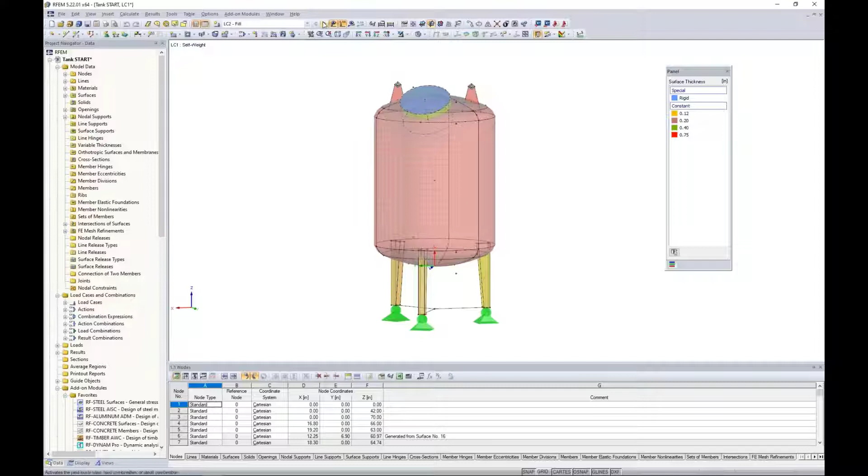We had applied the loads to the structure, and we can see within our drop-down box here are our different load cases. We have self-weight, which I don't have any visible loads displayed here because I didn't apply anything to the dead load other than accounting for the self-weight. Load case 2 here is the fill load, and this fill load was just an interior surface load within the inside of the tank.

We also have a wind load, so we can see the windward direction here from the global x-axis. We have a suction force on the leeward side. We also have a compression force coming up from underneath the tank, and we have a tension force up at the top here. Now we also put together all of our load combinations per the ASCE 7, so as we scroll through these, we can see all three of those different load cases acting together on the structure.

So starting where we ended from webinar 1, we'd want to run a calculation, and we can go to calculate all. For the sake of time, I've already gone ahead and done so.

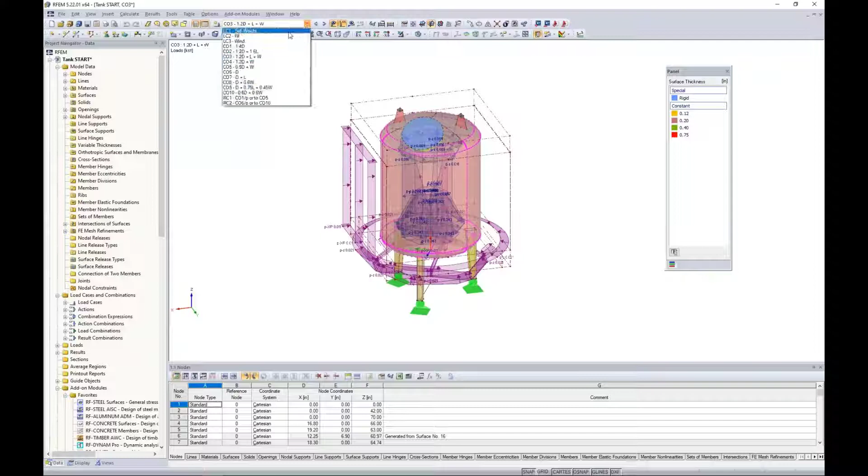So what we would be presented once we run the calculation is our results. Within the project navigator, we should now have this fourth tab available to us called results. I think it's helpful if we just collapse most of these trees here, just to slowly go through all of the visible options, and we'll start off with the global deformations.

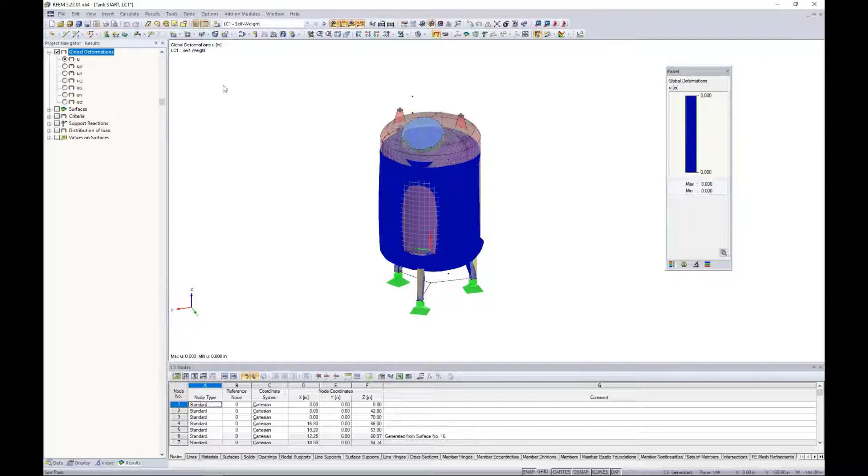As I'm scrolling through these different load cases and load combinations, and I can go ahead and turn off my loads as well, I'll see the general deflection of the structure. This might be helpful in understanding the behavior under the applied loads. If we see something kind of flying off the page here, then we would understand that maybe we didn't correctly model something, or maybe our loads were incorrectly applied. So it just gives us a sense here if everything is going well.

What else might be important is jumping back to my fill load. Remember from webinar 1, when I double click on this fill load, we have it increasing linear in the Z direction. At the top of the tank, I want this fill load to be 0, but as we slowly increase the depth, we eventually reach a magnitude of 0.4 kips per square foot, which makes sense since the bottom of the tank sees a higher fill load than the top.

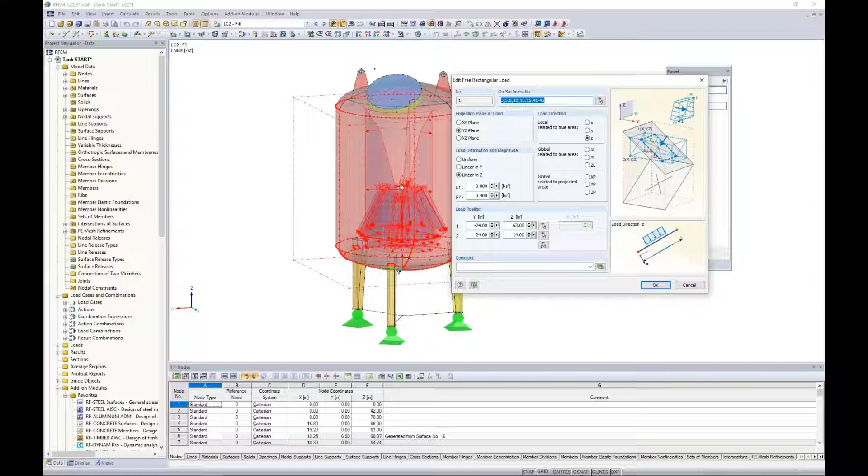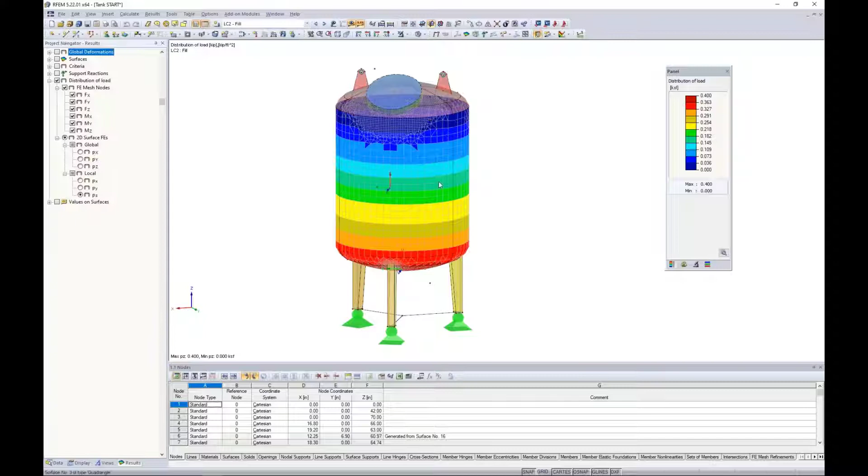So what I can do with this load case after running my results is turn off the global deformations, and instead take a look at the distribution of load. When I view the distribution of load in the local Z direction, we can see how this load was distributed on the FE elements.

At the top, we have this blue color, indicating 0 kips per square foot, which is exactly what I defined with that particular surface load. But at the bottom of the structure, we have these red contours defined, which equals 0.4 kips per square foot. So it's a nice validation that we correctly applied that fill load.

In a similar sense, we can take a look at the wind load. Remember, if I display this load again, we have it acting in the global X direction. Looking at the distribution of the load with these contours, I should see my highest compression force on this windward side, which relates to the negative value here. And then in the back, we have this suction or tension force, denoted by this yellow positive value at about 0.01 kips per square foot.

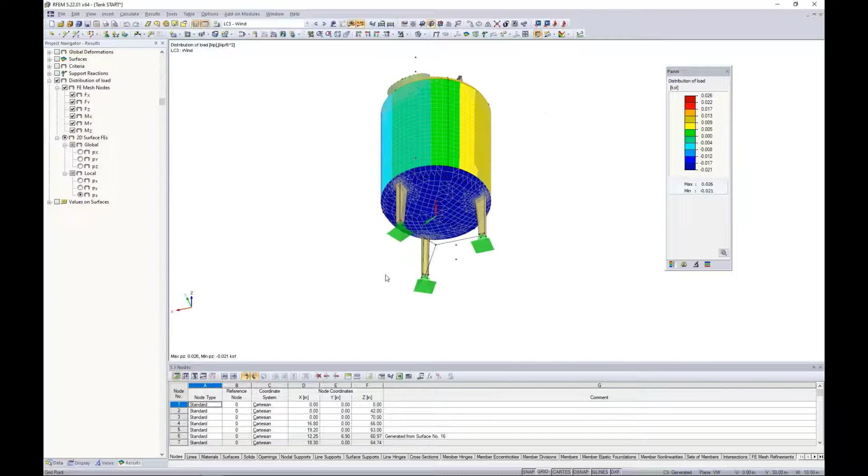At the sides, I should see essentially 0 because the wind's passing right over each of the side surfaces, denoted by the green color. If we take a look at the bottom, this shows the correct compression forces. And at the top, we have these suction forces denoted by red with a positive 0.026. So again, just a nice validation to ensure we've applied our loads correctly.

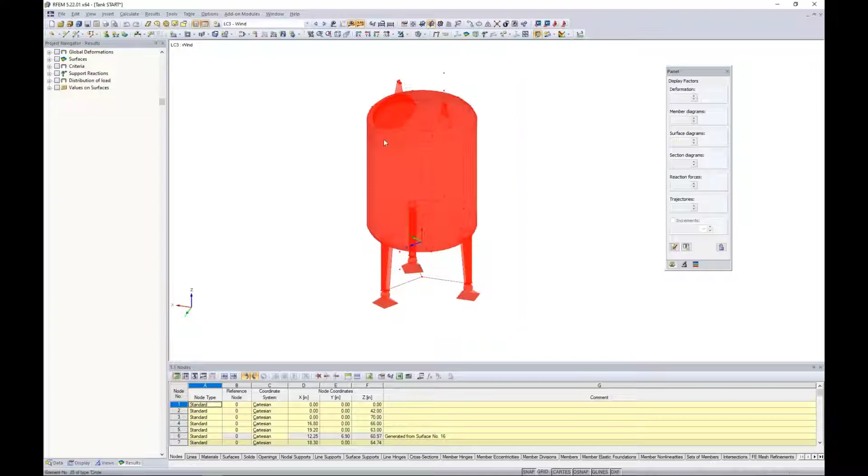We can also take a look at the entire structure by selecting it with my selection box. I right click and have the ability to view the center of gravity and info. The program throws up a warning that some elements have 0 density and won't be included in the center of gravity. We know this because in webinar 1 we created different intersections with our surfaces and deactivated components. We also have our rigid component for the top of our manhole that we wouldn't necessarily want to consider for the density, so that's why those are set at 0.

But what this gives us is the information of the center of gravity, and we can also create a new node. It's difficult to see, but there's a red arrow pointing to the center of gravity. More importantly, we can get information such as the surface area and the coating of the surfaces.

So why would the coating be important? Well, if we wanted to layer some type of coating on this tank structure, or paint, we actually have the area in inches squared of how much paint might be required. We also have the volume of the material as well as the weight of the material - just a general summary of all the surfaces we've modeled.

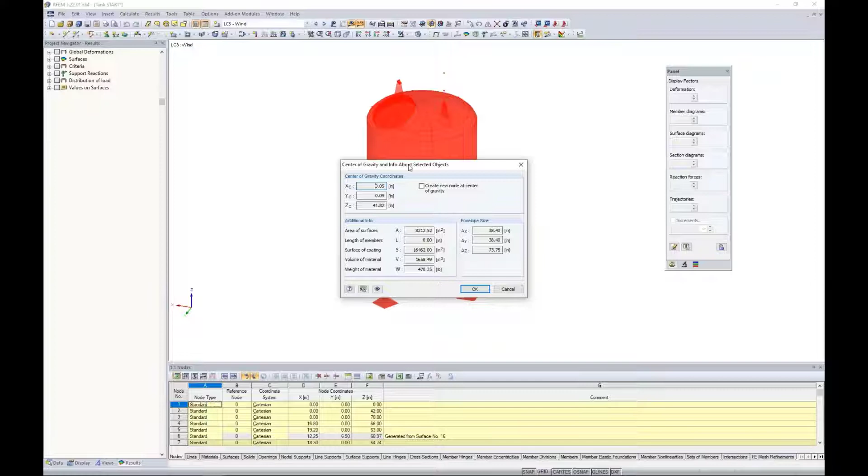In a similar sense, I can take a look at my tables, and I'll jump to my results here, which is table 4. I can view my results summary. What might be interesting is to jump down to load case 2, our fill load again. We can view the sum of the loads in the Z direction, and you can see it's set at negative 3.03 kips. So this is the total load from that interior fill load I've applied.

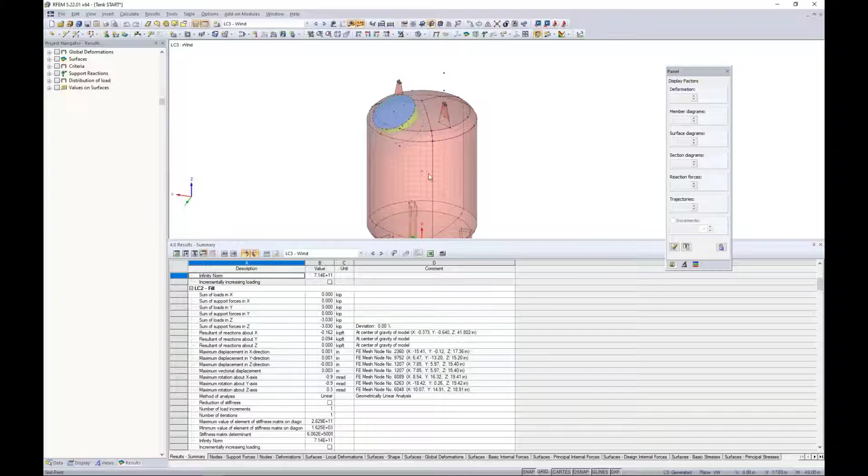We would expect our support reactions to match this sum of loads. So when I activate the support reactions in my project navigator, we turn on the global, making sure I'm under the fill load, and turn on the global Z components. You'll notice we have 3 reactions in the vertical Z direction at 1.01. These add up to the sum of loads for LC2, the fill load, at negative 3.03. So again, just checking that everything matches up quite well.

Now we can really move on to the results of our surfaces. With this, I can expand my tree here for my surfaces, and maybe we jump to one of these different load combinations here to view our results.

Now, what we have visible to us here is local deformations. These are based on the lowercase x, y, and z axes. So this is related to the individual axes here of each surface rather than our global axes.

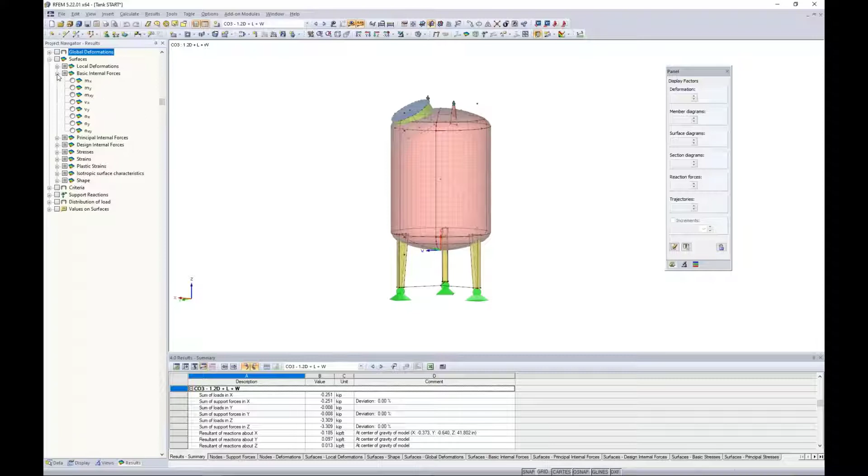But we can also view the basic internal forces. What I'll do here is activate a single surface and change the visibility by selected objects, then zoom in. Let me also right click to turn on the local axes of this surface element. So we're currently viewing the bending MX. We also have MY. We can view the shear forces as well as the axial forces, NX, NY, and NXY.

One thing to note here that is unique for surfaces is that MX is not bending about the local axes, it's along the local axes. So this is contrary to our belief for 1D members that MX would be bending about the local x-axis. So surfaces or plate elements have a different convention here.

One thing that I think is helpful to understand how these internal forces are calculated, or the convention related to these local axes, is under the help manual. We can take a look at the manual in PDF format for RFEM, or we can also access the online manual on our website. If you go to dlubal.com, you'll also find under downloads and info, online manuals. I'm currently looking at the RFEM online manual, chapter 8 for results.

If we scroll down here to section 8.15 for basic internal forces, the reason why I wanted to point this out is because it shows a nice picture of the internal forces in relationship to the local X, Y, and Z axes. Again, we can see something like MX is bending along the X axis, MY is bending along the Y axis. We also see these axial forces, shear forces all shown here. So this just gives us a better view of how exactly those forces relate to the local axes.

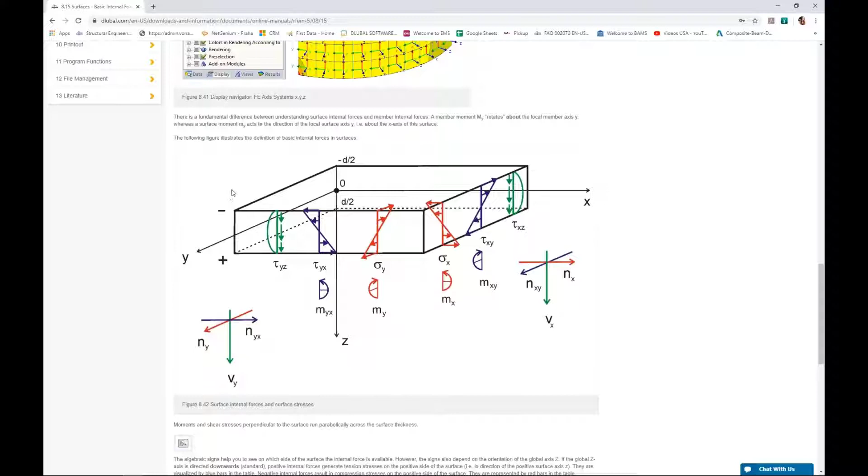Keep in mind too that for all of these internal forces, this is true for stresses as well. The equations are directly within the help manual, so if we're curious to know exactly how these internal forces are calculated, refer to the manual. Going back to RFEM then, that will essentially sum up the internal forces.

But you'll notice that the next option, if I expand the tree here, is principal internal forces. This is showing me M1, M2, we have N1 and N2. So what exactly is the difference here between the basic internal forces versus the principal internal forces? The basic is really internal forces relative to the freely defined X, Y, and Z local axes, as we already discussed.

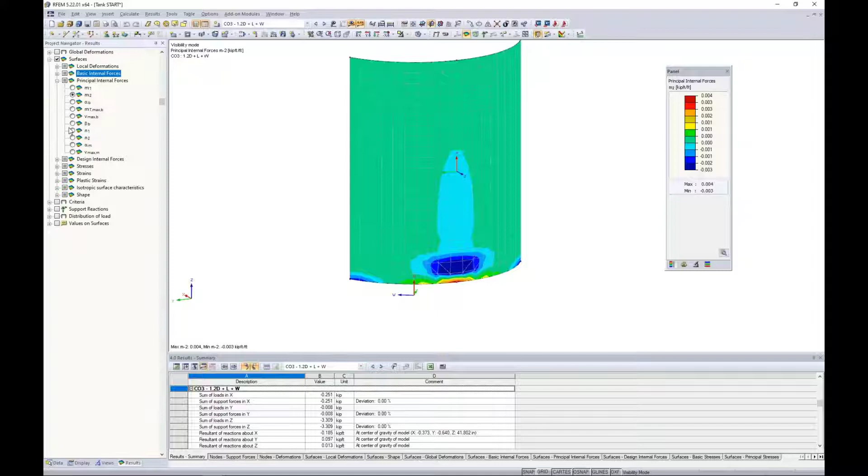For the principal, we will represent the extreme values of the internal forces. Essentially, we'll take the basic internal forces that we just saw and transform them in the principal axis direction. So principal axis 1 will be the maximum value, which we can see here as M1. Then we have axis 2, which is the minimum value. We also can display this alpha factor here. The alpha is going to be the angle between the local X or Y axes and the principal axes 1 or 2. And we need to increase the trajectory factor here.

I do so quite a bit, and then we can see down at the bottom those trajectories are visible to us. Again, that's going to give us the angle between our local x-axis and our principal axis. Now, in some scenarios with a completely straight, flat surface, maybe there is no difference between basic internal forces and principal.

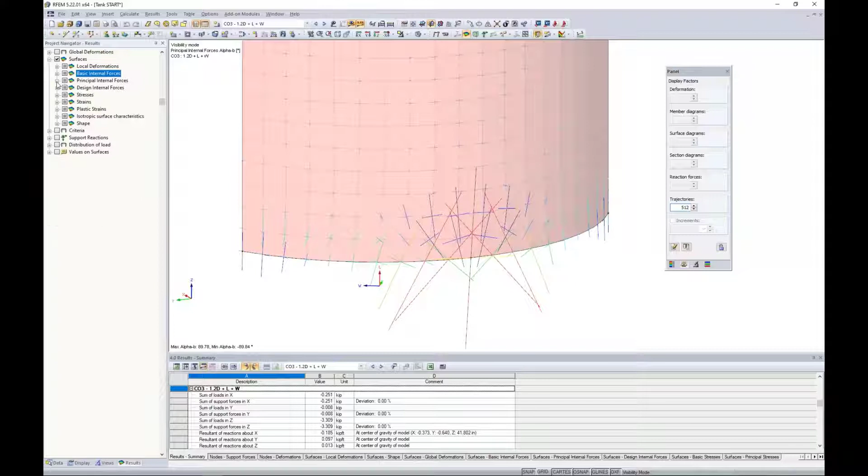Looking at the design internal forces, this is really more relevant to concrete design. So we're going to give you the positive and negative bending internal forces for the top of the surface versus the bottom of the surface. You can imagine how that's beneficial for concrete design. This might be used if we weren't utilizing the add-on module within RFEM, but rather we wanted to take these internal forces into our own in-house tools or spreadsheets to do design. Now today we have steel surfaces, so this really isn't of much interest to us.

Now we have the stresses also listed here. As far as the stresses, these are only available within RFEM when you have purchased the RF Steel add-on module, which we'll get into in just a minute. But it also releases these stresses within the main program, so if you did not purchase that add-on module, you would not see the stresses available here. This is true for all materials, even timber stresses, for example. You would need to purchase the RF Steel add-on module, which sounds a little counterintuitive, but essentially that's releasing these stresses we are currently viewing.

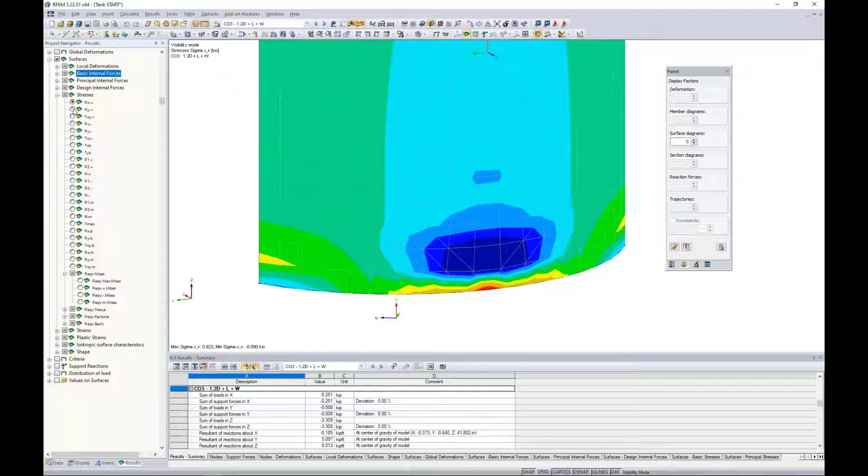So we can view the normal stresses in the X and Y direction, shear stresses, but we also have the principal normal stresses and principal shear stresses as well, based on those principal axes we just discussed. A little further down, you can see our equivalent stresses, and these are based on 4 different hypotheses: von Mises, Tresca, Rankine, and the Bach theory. Quite common would probably be to refer to von Mises for design.

We can also close down these stresses and view the strains in a similar manner. So we have our strains based on the local XY axes, principal strains, and then of course equivalent strains as well, which again are based on those 4 different hypotheses shown here, which maybe von Mises is most relevant to our design.

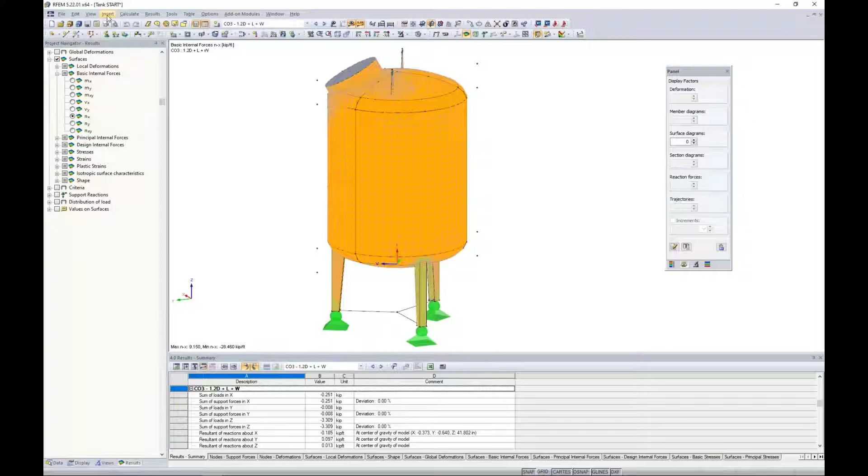Jumping back to one of the basic internal forces here, it doesn't really matter which one. I'm going to cancel out this visibility. I thought it would be a nice feature here, and if I turn off my local axes of the entire structure, what we can do to view the interior stresses of this kind of enclosed tank is take advantage of our clipping plane. So under Insert, we have clipping plane.

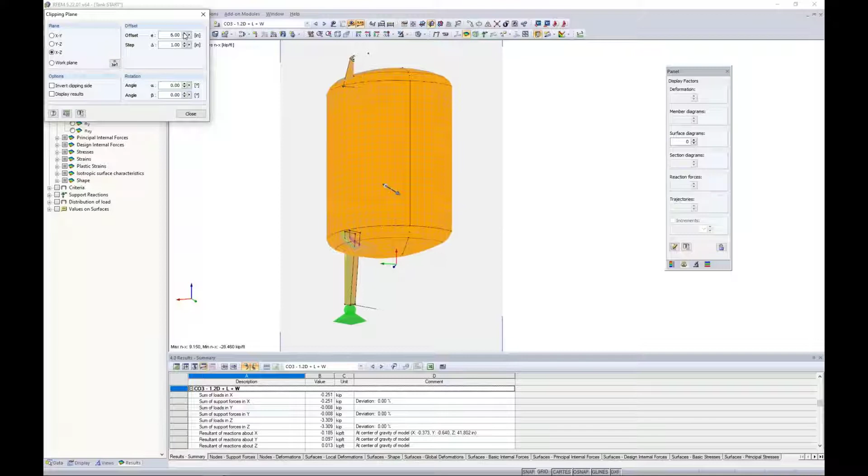What this will do is essentially slice through our tank here so that we can see the interior stresses. We can set a step distance of 1 inch, for example, and then use our offset button to click around within our structure, which will essentially cut through that structure with this clipping plane. We also can change the plane we're viewing, and even more so we can change the rotation, so we can change this to 25 degrees, for example. Now we're viewing this clipping at an angle.

So obviously the clipping plane may be an advantage to use when we're looking at these enclosed type structures such as tank elements. Where it's an even bigger advantage, as you can imagine, would be with 3D solid elements. So where we truly can't visualize the stresses on the interior of the solid element, clipping planes can become very useful.

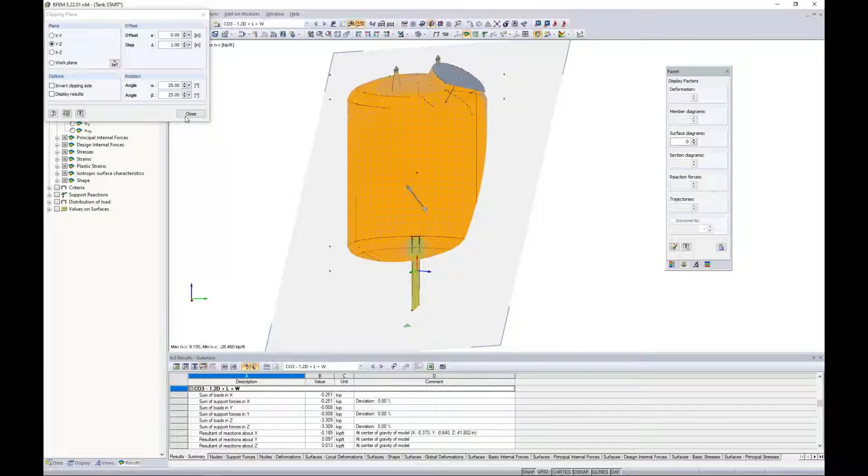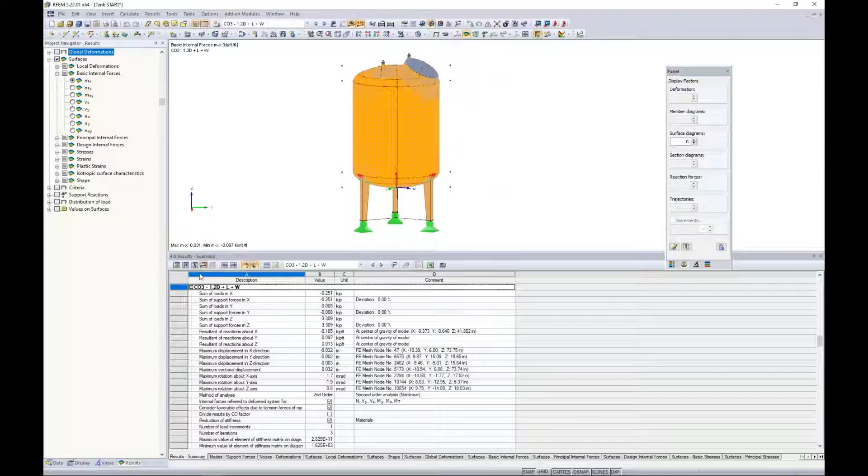So currently we're looking at everything graphically, but I wanted to also point out that all of this information we're seeing visually here is also available in table format. We can view again under Table 4.0 the results. Perhaps we jump to the surfaces for the basic internal forces.

There's a couple things I want to point out here. We're currently viewing each surface, and you can see the program syncs up in the background which surface we're looking at. But if we jump down here to surface number 5, you'll notice that only a single point is given to me here with internal force values. So why is that? Well, I'm going to create this visibility by the selected objects to take a look at surface number 5, and you'll see that single point given to me right here in the center.

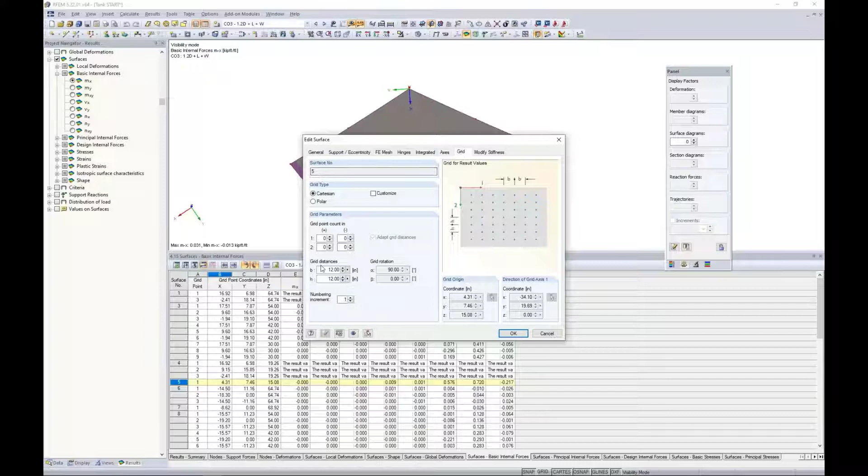This is a problem. Obviously we're much more interested in the internal forces going on around this entire surface. So why is there only one value given? Well, that's because the results are based on grid points. If I double click this surface to edit it, we have a tab here called Grid. By default, the grid spacing is set at every 1 foot. Well, this is entirely too big for our model today.

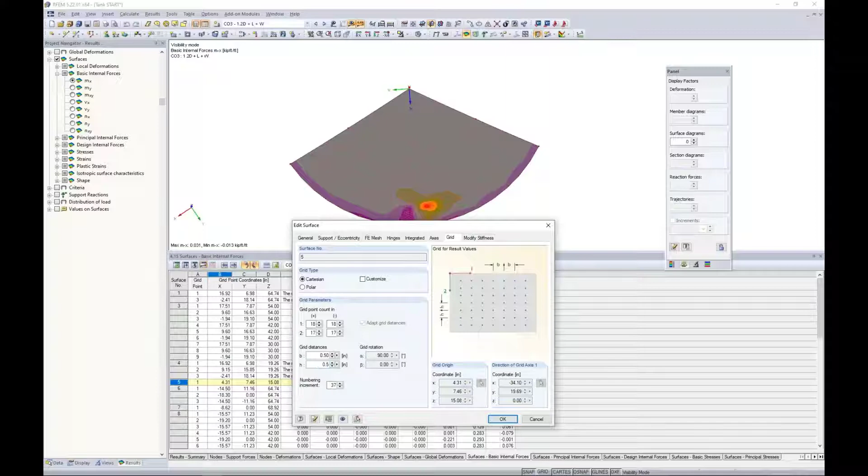Now, this tank structure is fairly small, so we need to go back—in Webinar 1 we did this with the FE elements—and we want to do the same with these grid spacings, changing this to maybe something like 0.5 inch spacing, and click OK. So now you'll notice with surface number 5, I have many, many more points available to me here. This is obviously going to be much more beneficial than just a single point element.

Now the question might be, well, is the analysis incorrect without changing those grid points? And the answer is no, the analysis stays the same. You'll notice we didn't have to rerun it. Everything we're viewing visually here is based on the FE mesh element points. And if I turn off my results here, turn off my loads, these FE mesh points are producing the results, and then we can graphically see this with the nice contours.

When it comes to the table, we're not presenting the results based on every FE mesh point. You can see that it's kind of all over the place, with really no nice pattern to the FE mesh. So that's why we're presenting it to you in grid points, so that every 0.5 inch spacing we're getting a result.

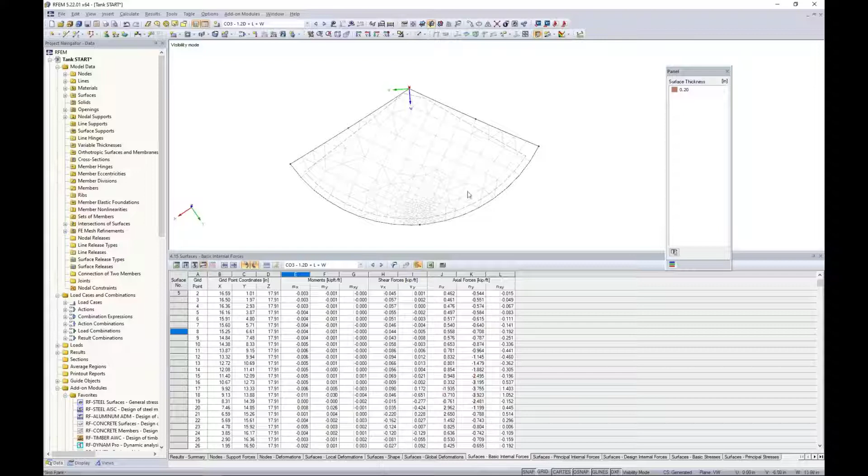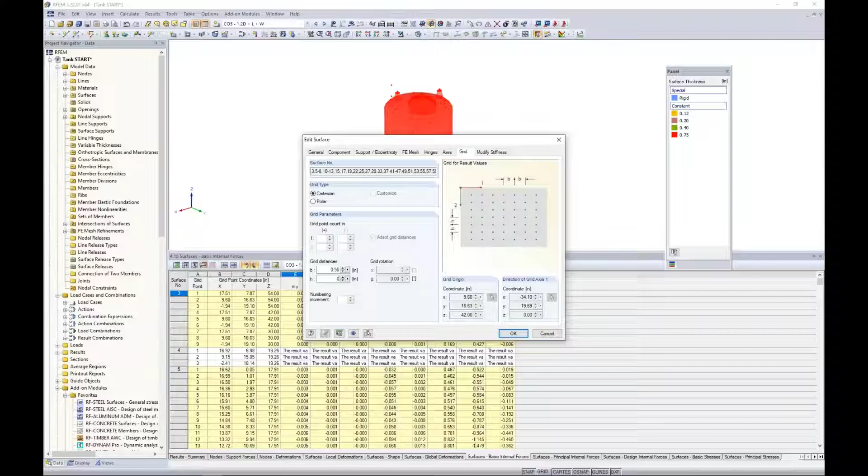What we need to do here is cancel our visibility mode and zoom out to the entire structure. We want to select all surfaces, and we can double click on them. Under the grid tab, we can change the grid spacing of all surfaces at once to 0.5 inches, and click OK. Now we're going to see much better results within our table.

Keep in mind, for these table results, we can export this single table automatically to Microsoft Excel. I can simply click this button here, and the program will take the current table I'm looking at and export it over to a Microsoft Excel spreadsheet.

If we wanted to export multiple tables at once, maybe for multiple load combinations or load cases, that's possible by going to File, Export, and here we have an XLS format.

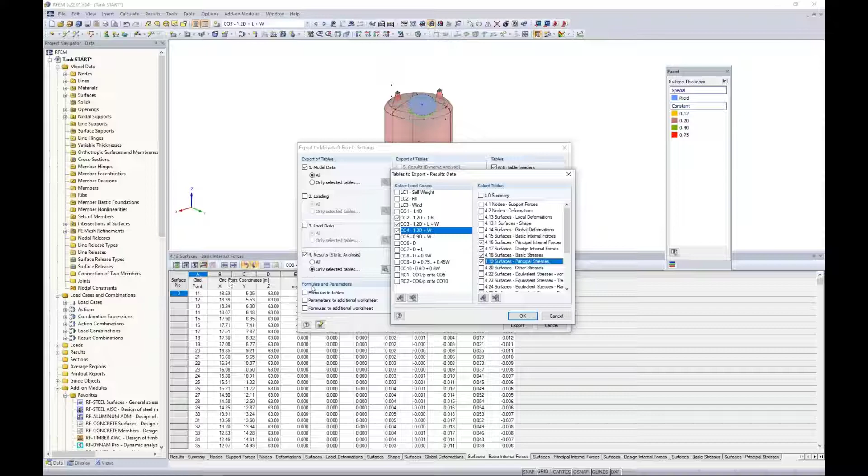When I click OK to export to Microsoft Excel, this gives me quite a few more options. I can activate my results, and take a look at these detail settings for the selected tables. I can turn on several load combinations or all of them, and select different tables to export. So you can imagine this is quite a bit more efficient than exporting every single table from what I previously showed you. But if you're just looking for a quick export to sort or filter data, that's possible here too.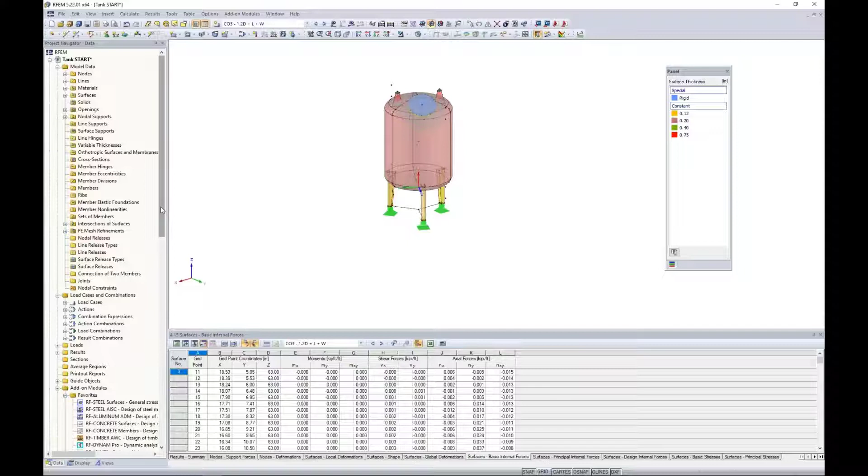We can access the add-on modules, as I pointed out in Webinar 1, under our Project Navigator. Here's our long list of add-on modules. RF Steel Surfaces is at the top because I've right-clicked and activated it as one of my favorites to jump it up to the top here. We also can access all the add-on modules from our drop-down box up at the top under Design for Steel, and you'll see RF Steel Surfaces there.

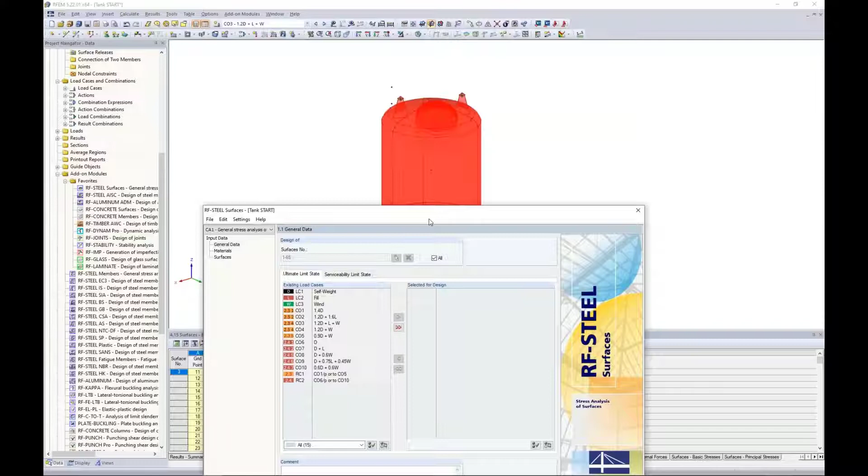With this add-on module, as I always like to mention, it's just a simple dialog box that pops up within the main program RFEM. I don't need to remodel the structure, I don't need to redefine loads. Even all of those internal forces and stresses have already been solved for, so all of that information is coming into this add-on module. We're just specifying a little bit more information specific to the general stress design.

Keep in mind also that this is completely code independent, so we're not designing for any particular code. We're just comparing the stresses from the analysis to the limiting stresses based on the material.

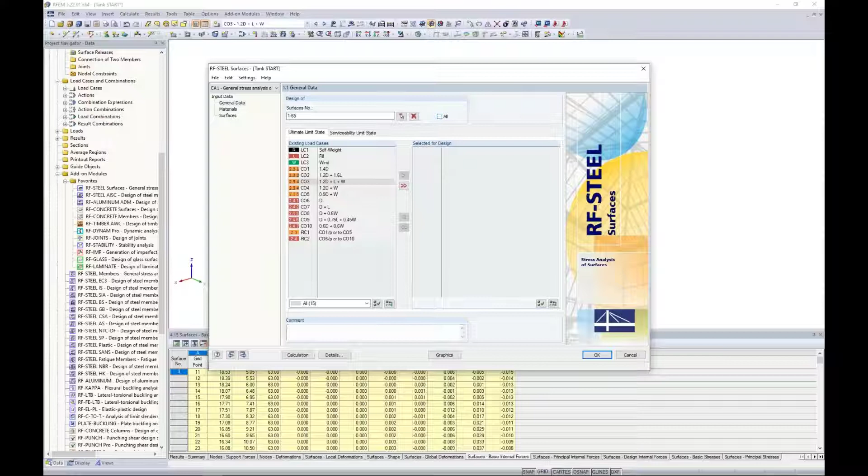By default, the program selects all surfaces to be designed, and I don't want that today, but rather I'm going to graphically select which surfaces. Under the Display tab, under the Views tab, is where I'm going to activate my surfaces by thickness. I'm going to choose my surfaces that are 0.2 inches thick as well as 0.12 inches thick. This will highlight only in the graphical view the body of the tank as well as the legs. These are the only surfaces I'm interested in designing at the moment. You'll notice everything else is hidden, including the components on our roof.

When I click OK, all of those surfaces are individually listed out here. For the ultimate limit state, I want to move my LRFD load combinations over to the right-hand side to be considered for design. Additionally, I could select the result combination to be moved over, or I could just design the result combination itself.

If we remember from Webinar 1, result combinations are going to be an envelope solution. So I have RC1 here, which would be the envelope solution for all my LRFD load combinations, showing me the max and mins. I prefer to list out the load combinations individually because then I can see my max and mins from each individual load combination, but either are possible.

The serviceability limit state is to check deflections. For my tank example today, I'm not so concerned with checking deflections, but if we were designing some type of floor element or industrial structure sensitive to machinery, where deflections are truly a concern, this is where we'd want to move our ASD load combinations over to the right-hand side to be considered for serviceability. We'll leave those blank for now and move back to the ultimate limit state, continuing down our list.

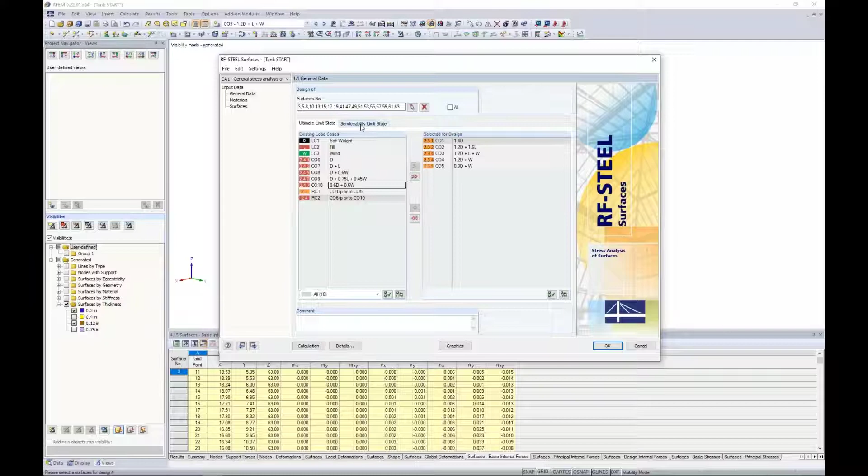The materials are automatically brought in from RFEM. We have our stainless steel material, and the yield strength is given as 30 KSI, with the limiting stresses automatically filled out. We can see the limiting normal stresses as well as shear stresses—these are the values the program compares to my analysis stresses to give an overall design ratio. You can also choose to manually override these. The program automatically sets them based on yield strength, but you can click this manual button to override those. We won't be doing that today.

Under these edit material settings, we can also set a few different ranges based on material thickness. Perhaps for a thicker surface, we might have a higher yield strength. We can set ranges for the thickness as well as the equivalent yield strength, and the program will consider that for the design of our surface. Today that's not so important since we only have uniform thicknesses for our surface elements, but that's one option to consider.

Also within RF steel, this isn't specific to only steel materials. For example, if you wanted to do a general stress design for aluminum, you could bring an aluminum material in here. You would need to modify the limiting stresses manually, but then we could also do a general stress design for aluminum surfaces as well. So it is not only limited to just steel.

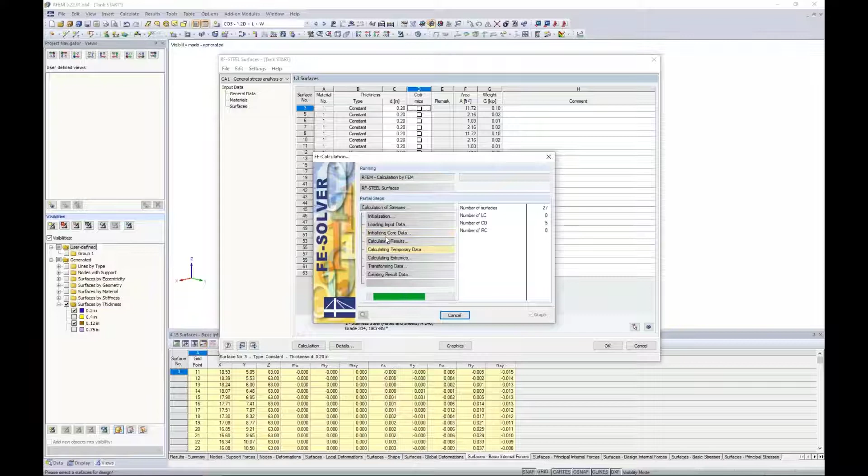When I run the calculation, we'll see that it solves pretty quick because we already have all of our stresses from RFEM and the analysis for our LRFD load combinations. We're just bringing them into this add-on module and comparing to the limiting stresses based on the material.

So we now have our results tables available to us, and we can view the stresses by load case, these stresses by material, or these stresses by surface. When I pull this down, we can see that everything is synced up in the background. We have the red arrow pointing to where the controlling internal force is, as well as the surface highlighted that we're currently looking at.

Here's the column for existing stresses, all listed out. Here's my limiting stresses based purely on the material. And from this information, we get the general stress design ratio. Now, there are only a handful of stresses listed out here.

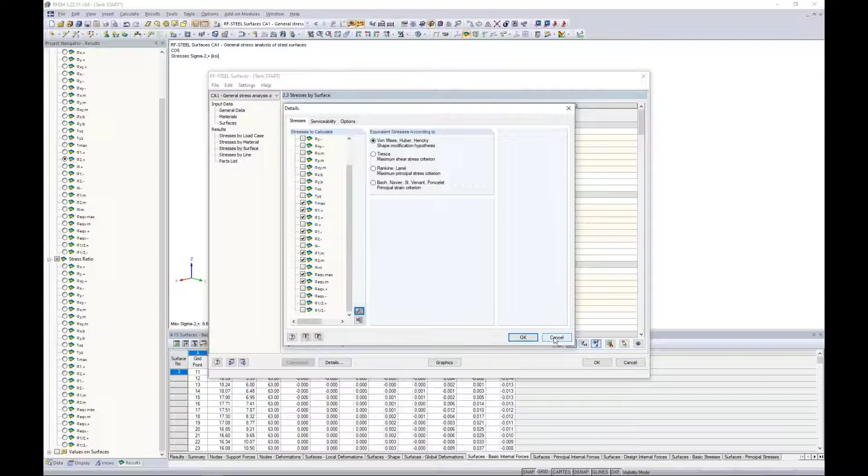Under the Details tab, this is where you can control what stresses are turned on or off and used for this design. By default, we've already selected a handful of stresses available. We don't want to check all of them—that's completely overwhelming and may not be necessary for the design. But if you're interested in turning on or off some different stresses, you can do so under this Details tab. For the most part, most of these stress design ratios look okay.

But when I take a look at the filter options here to filter to the max design ratios, and view the summary down at the bottom, I have a max check of 1.4, which is greater than 1.0.

So I'm shown here my red sad face. This is obviously something we need to address. We're over that yield strength. So how can we do so? Let's take a look at graphically what's going on rather than just in our table.

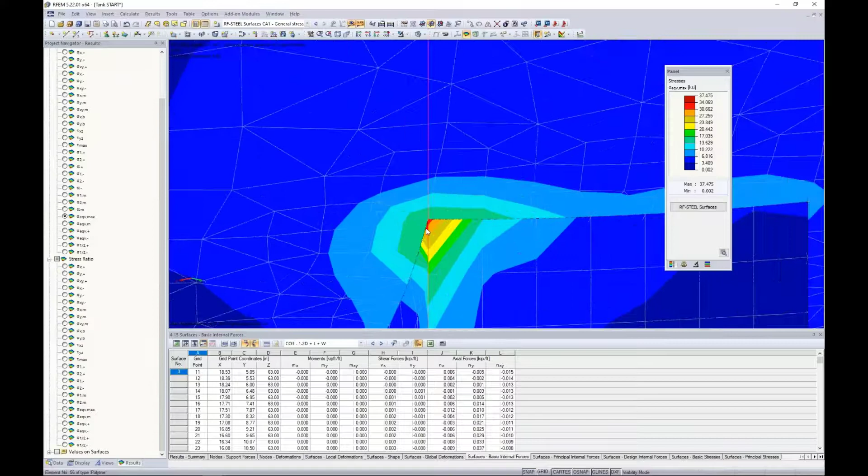I'm going to click here to my equivalent von Mises stresses. You'll notice it's for load combination 3, and I can click on my graphics. Most of the tank here, when we look at our von Mises stresses, keep in mind that we're still within this add-on module RF-Steel, we just view the stresses or stress design ratios graphically. When I scroll in here, we just have these teeny tiny points that are really causing the issue, and everything else looks completely fine.

So this is what we would call a singularity. Singularity is not unique to RFEM. It can happen in any finite element analysis software. It's really a point, an FE mesh point, where we have a very high stress concentration and we're not getting great load distribution.

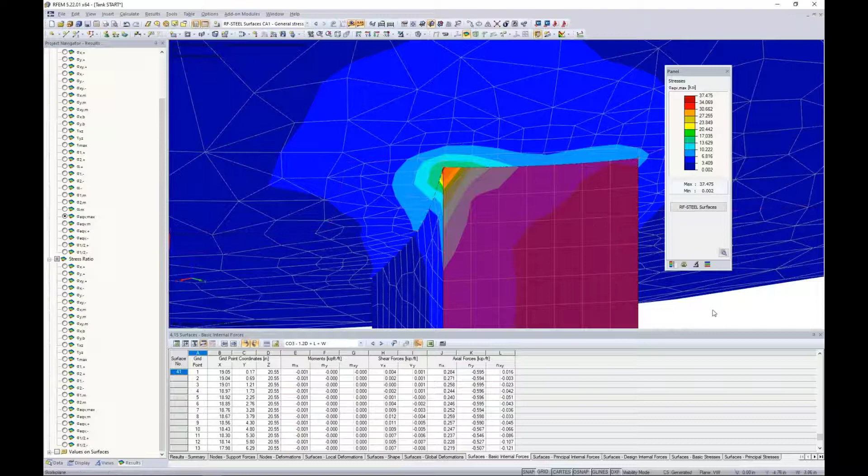We know in reality where this tank body is connecting to the tank legs that we're going to get much better load distribution all along this length than what the program is showing me. So how can we better tell the program that the load distribution is there, that these high stress or high peak points are causing the over-design of my general stresses to be much too high?

Let me jump to load combination 3 here because we've determined that's the controlling load combination, and I'm going to turn on my von Mises stresses. So this is exactly what we were looking at within the add-on module itself.

Under the display tab, this is typically what would be available. I know it looks a little overwhelming, but we can collapse these trees, and eventually I want to focus on this results portion. We also have these surfaces, which I can expand under the results, and the distribution of internal forces and stresses.

You'll notice here that we have several options for how we display these stresses. The third option is default here, but I want to focus on the first 4 options and what exactly they mean within the program. For this, I'll jump to the PowerPoint.

As far as the display of surface results, there are 4 options, and number 3 is default within the program — we'll get to that in a minute. Let me begin by explaining the concept here: we have 2 adjacent surfaces. The surface on the left is denoted by 6 FE mesh elements with their individual boxes, and then we have a surface element adjacent to it indicated by these 3 FE mesh elements.

So when we choose the first option, constant on elements, we have every FE mesh element point, right? We're going to average out those 4 points for a single FE mesh element and give you that average value right in the center. Then we're going to base our colored contours only on that average value, so each FE mesh element will only have 1 color.

The second option, non-continuous, you can see there are quite a bit more results available because instead of averaging out those 4 corner values, we're going to display them separately for each FE element. So now you'll have multiple color contours within a single FE mesh element.

The third option is continuous within surfaces, and this is the default within the program. What we do here is take the average at the FE mesh point itself, then use a smoothing algorithm to tie these values together in nice contours so it creates a great display when viewing it within RFEM. But notice we do have a clear hard line between surfaces — my surface on the left has its own contours and my surface on the right has separate contours. This is default because it works quite well in a majority of cases, especially when looking at a more global scale, like a concrete slab element.

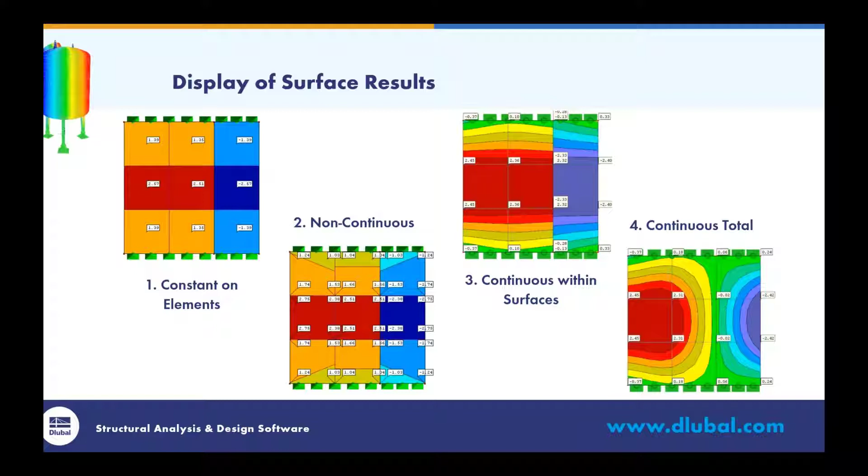So again, number 3 is typically fine, that's why it's default, but there are scenarios, especially when we're looking at a much more local scale here of where these small little elements are connecting at every FE mesh point, that we want to change this to actually constant on elements.

So going back to the RFEM model, you'll notice here that when I have this as default, continuous within surfaces, my von Mises stress is set at 37 KSI. When I change this to constant on elements, now notice each FE element has its own color, and the stress drops significantly from 37 KSI clear down to 16 KSI.

That's a huge difference. Now, again, this doesn't relate to what's right versus what's wrong with the analysis itself. It's just purely how we're viewing our results graphically here. And just by changing this view, you can see how much those stresses are impacted.

Now, when I go back to the add-on module RF Steel, let's go ahead and launch this add-on module. I want to point out that I changed my display, as we saw back in RFEM. But when I'm looking at the total stress design ratios here, they're still showing 1.4, which we know our highest equivalent von Mises stress, for example, is only 16, so we should be well below this.

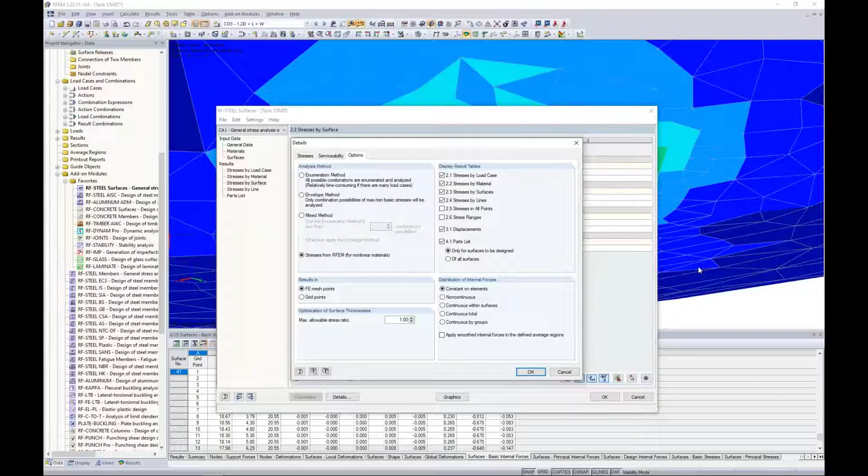Well, the reason why is under details, we need to set this under the options as well. We would change the distribution of internal forces to constant on elements. So although we've changed it back in RFEM, the add-on module has its own separate option here that we would want to change. So when I click OK, the program says it needs to recalculate the results.

So we go ahead and let it bring in those internal forces again. It compares to the limiting design stresses. And sure enough, you can see my max design ratio is now 0.62.

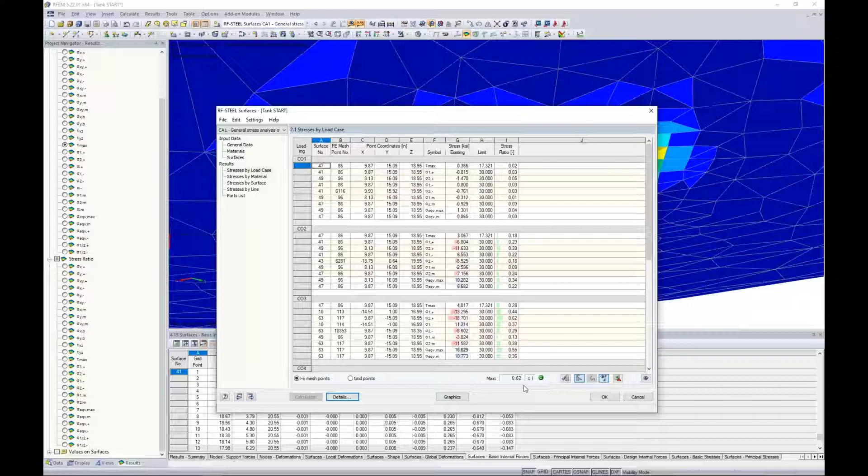So just by changing the view of our results, we can really significantly impact the overstress design ratios within the add-on module. Now, with that said, if we take a look here at stresses by surface, let's take a look at the von Mises stresses, for example, and I jump to my graphics view again.

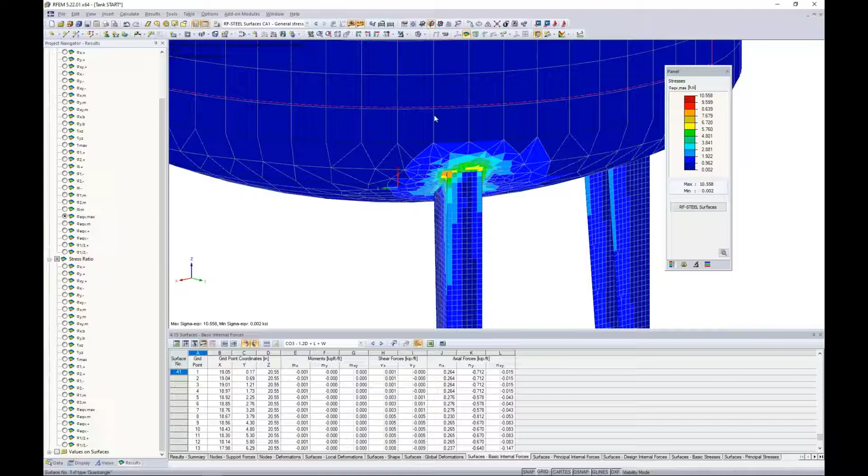So I'd still like to point out, though, we took care of this high design stress ratio. We're definitely sitting much better, but I'd still argue that there's a singularity still occurring at this location. I mean, if you look at the rest of the structure, the stresses are so low, but when we look at these FE mesh points, they're still relatively high.

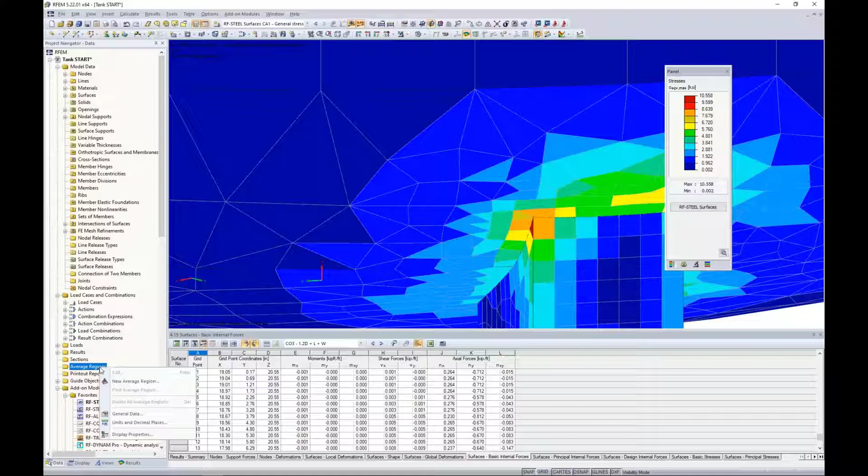So I want to take this a step further to address these singularities by applying what's called an average region. So under the Data tab, what I can do is access a new average region by right-clicking on it. We launch the dialog box, new average region, and it's exactly as it sounds. What we're going to do is average out the internal forces over a particular region.

And this is quite powerful because I can select multiple surfaces here to be considered. So we'll select the tank body. Maybe I also select these two surfaces from my tank leg. And I click OK. So we need to define the average region as a circle as well as the dimensions. And the dimensions, I will set this at 2 inches.

Now, the question that we may get is, well, how big to set the average region? And this really depends on your project, and it's up to the engineer's discretion. We're working with a very small tank here, so 2 inches is adequate just to apply this smoothing region at this particular location. But you can imagine if we set this at something like 2 feet, that's entirely too big to average out the internal forces. But 2 feet might be perfectly fine when we're averaging out a concrete slab where we have a column framing in. So again, it really just depends on your project.

We want to tell the program where to place this average region. So graphically, I can select this node here. The coordinates are automatically populated. I'm going to choose all 4 checkboxes here. What this does is average out the internal forces in all directions. This is based on the local axes, U and V, of the average region versus the local axes of the surface X and Y.

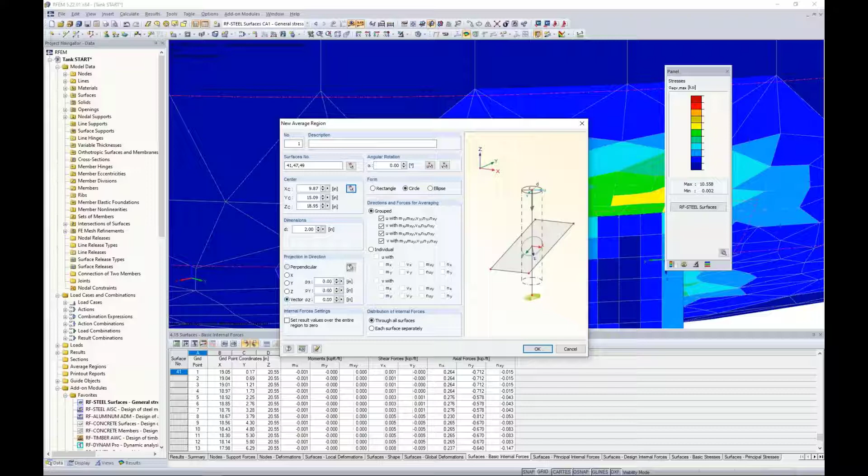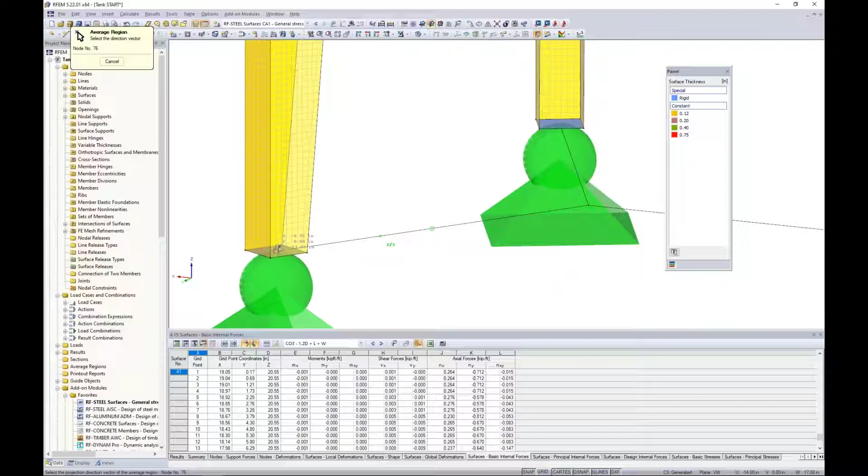So instead, what I can do is choose my own direction vector to average out these forces. When I choose this option, it allows me to graphically select a couple points. I'll zoom out here, turn off my results, and cancel my visibility mode. We remember from the first webinar, we created all of these points, and zooming into the bottom of my leg, I'm going to choose the center point here. My second point is going to be the center of the tank structure as a whole.

Now this projection direction was automatically calculated, and you can see the parameter set here. We want to distribute the internal forces through all surfaces. When I click OK, it might be better to turn this to a wireframe view. We have an average region defined here. It's a little difficult to see, but you can see we've applied this 2-inch average region, projected toward the center of the tank structure.

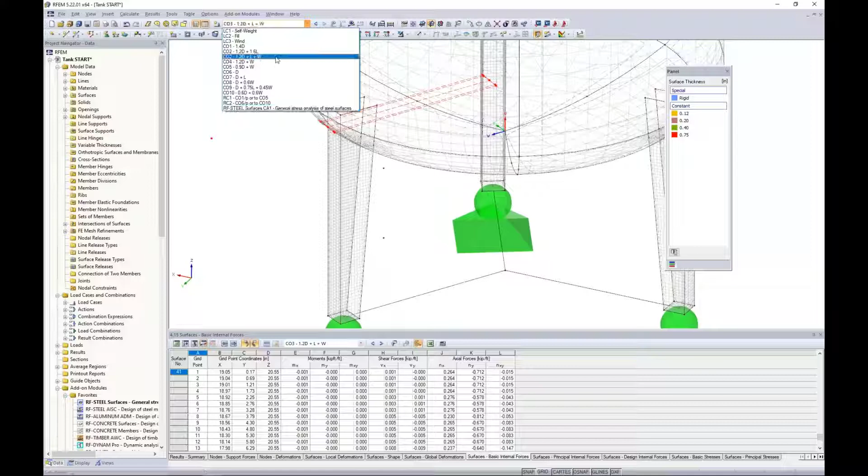When I apply this average region, I'm going to view my results for load combination 3, and we can turn these on. I'll maneuver my model and zoom into this point. I'm currently viewing my von Mises stresses, and notice we no longer have these high peak forces here—we're instead averaging out over this 2-inch diameter region for those von Mises stresses.

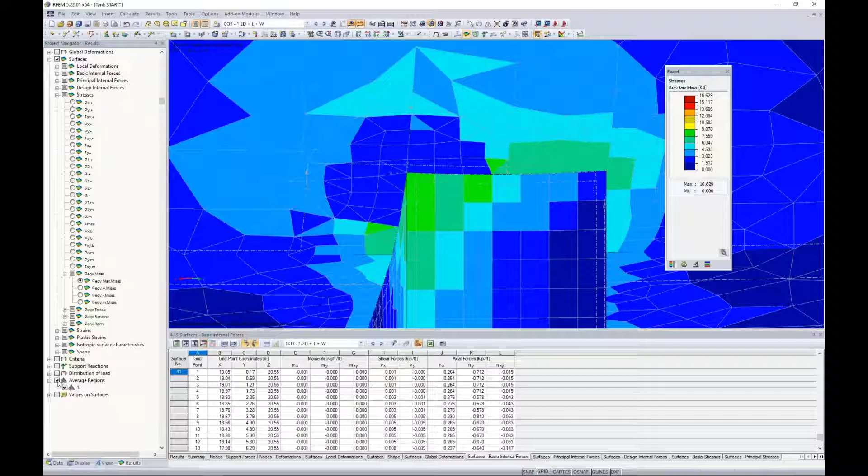Now, when you apply average regions, you have a new checkbox in your results where you can turn the average region on and off. If I turn it off, well, here we go—there's those high stresses visible to us. We can activate the average region again, and they completely disappear.

We'd want to continue adding these average regions to other locations where the legs are framing into the tank body, just to alleviate those high peaks. For the sake of time, we won't be doing that today, but hopefully you have some insight on how to apply average regions for odd structures like this. Obviously, a flat surface would be much easier to apply an average region to in terms of the projection direction and such.

Now back under the Data tab in RF steel surfaces, in a similar manner to what we saw previously with the display of internal forces, under the Details tab and Options tab, we need to apply the smoothed internal forces from the defined average regions. Otherwise, they will not be considered. So we just take that extra step within the add-on module to say yes, please consider them with the design.

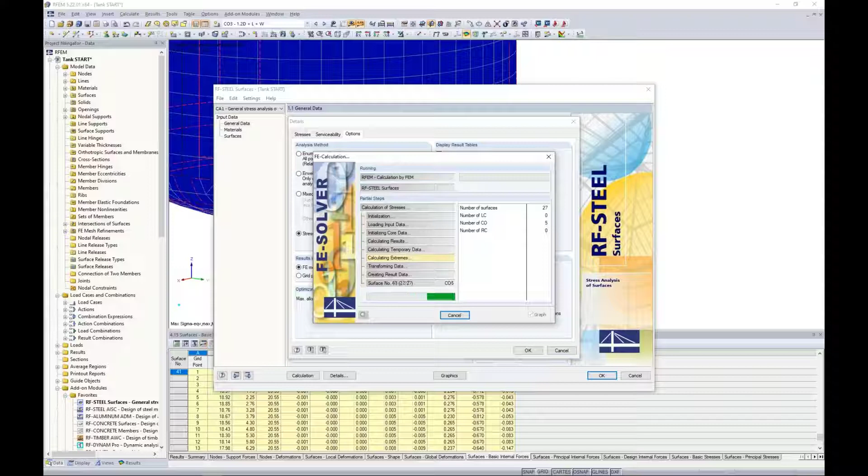The program will cycle through the quick analysis again, and we'll be presented with our results. Now, I didn't apply the average regions to the other locations, so we're still seeing the same design ratio, but we would expect this to fall significantly, and then maybe we could optimize our tank thickness quite a bit further.

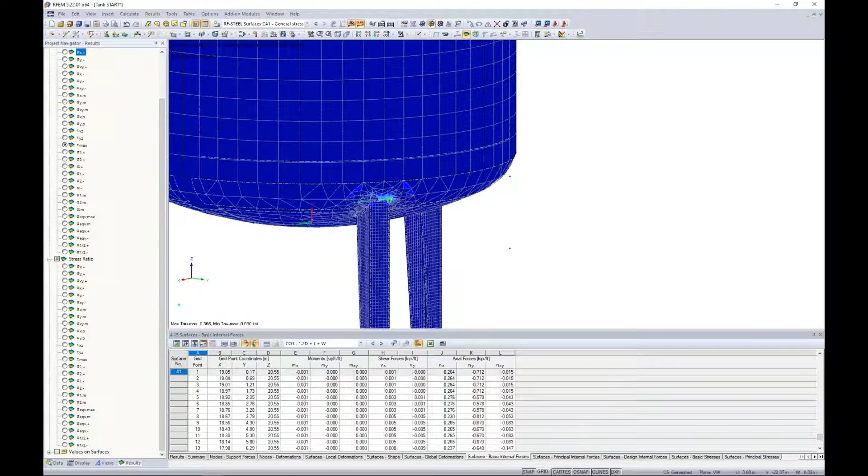All right, so that really explains a general stress design for these surface elements utilizing that add-on module. The next thing we'd like to discuss is the stability design, and in particular, the buckling behavior of this structure, which we'll relate to imperfections.

I'm going to launch RF stability from my list of add-on modules. When I do so, the add-on module has a similar feel to what we saw with RF steel surfaces, though it's a little different—this is going to allow us to run an eigenvalue analysis on the structure. In previous webinars, I've used RF stability to track down instabilities. We all know instabilities can be incredibly frustrating within finite element software, so RF stability can be extremely helpful in tracking down where exactly we may have a problem. But today I'm going to use the add-on module to do a general buckling analysis to identify modes of failure for the structure under the applied loads.

The number of eigenvalues needs to be defined, and the default is 4, so we'll leave that as defined. We want to import either a load case or a load combination. My worst case scenario has been load combination 3, and you'll want to import a load case or combination that has the highest axial forces. This gives the worst buckling failure modes, as opposed to importing something applying tension forces—for example, the program will throw up a warning saying it can't apply the eigenvalue analysis for buckling because we have tension forces. So something to keep in mind there.

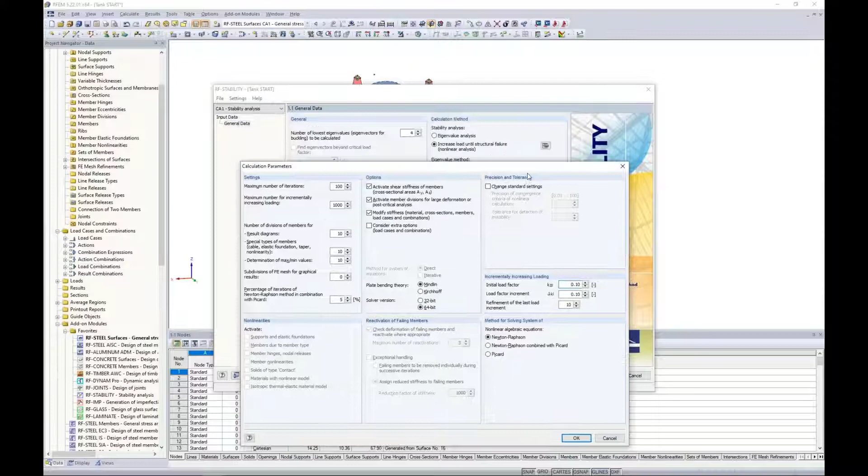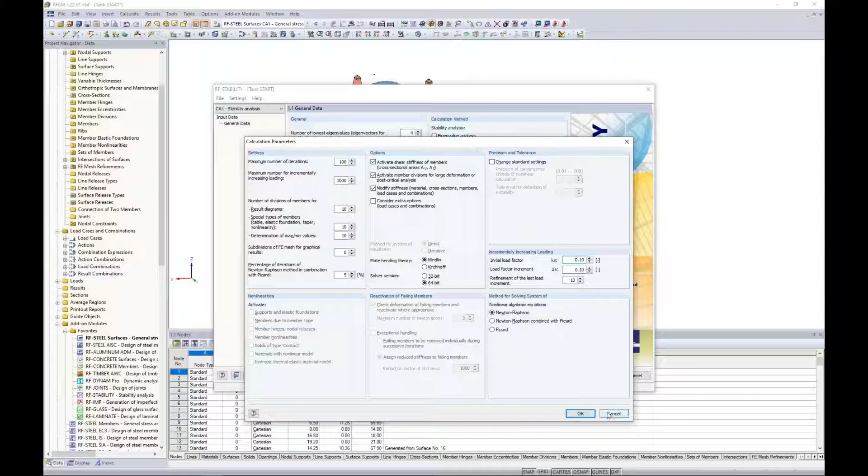We do have a second option here to run a nonlinear analysis, and this actually will consider any geometric or material nonlinearities back within the main model. We have the ability to incrementally increase the load. This whole section I'll get into later on at the end of the webinar, because I think it's actually pretty powerful, what we can do with a nonlinear buckling analysis. But for my initial calculation here, I just want to run a linear analysis to get the basic buckling failure modes.

Now, when I click calculate, the program is running through the first 4 eigenvalues. You can run up to 100 eigenvalues if you want, but it doesn't make much sense to look at those higher eigenvalues, because that buckling failure mode will probably never occur — it's taking extremely high loads to even see that type of buckling mode. So that's why we set this at 4 eigenvalues, and this will give us the general failure modes within our structure today.

Once this is done solving, we're presented with our results here in table format. We see the first 4 eigenvalues given to us, and we can scroll through these. You'll notice in the background the RFEM model is synced to whichever mode shape we're currently viewing, and it looks to be essentially buckling of this leg over on the right-hand side for the first 4 eigenvalues.

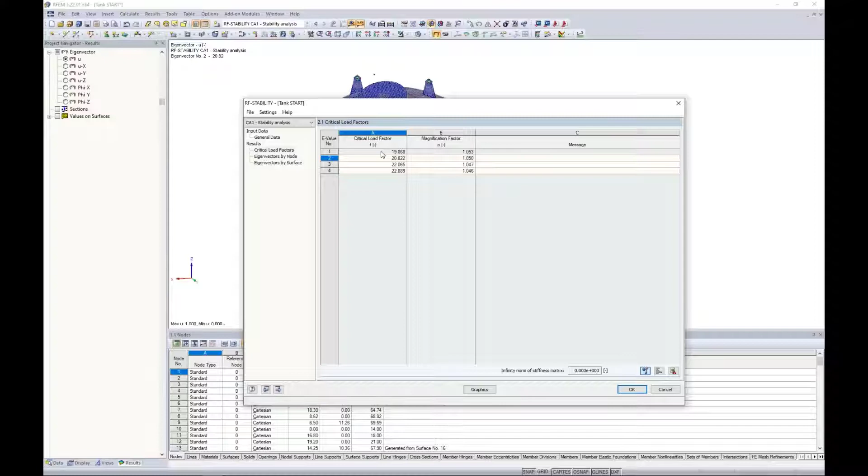We're also presented with the critical load factors. These are the values you can multiply load combination 3, which we imported earlier, by before we see the failure buckling mode shown in the background. So additional eigenvalues may not be so relevant when we get into higher numbers. But if we were solving for higher numbers, we might see buckling of the other two legs, or even buckling of the tank body itself — something to play around with.

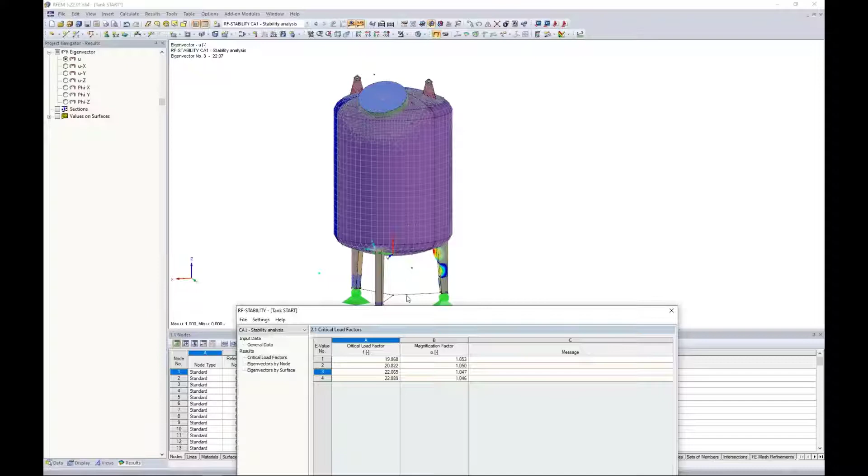Looking at the first eigenmode shape, we can jump to our graphics view. Once again, we are currently in the RF-STABILITY add-on module. I'm just viewing my results graphically here, and under this second option within my panel, we can also drop to the different eigenmode buckling failure modes if we'd like. So everything has to do again with this leg over on the right-hand side.

The eigenmode is shown to us here, and I can right click on the boundary line element of my leg surface. When I right click on it, I can choose results diagram, which brings up the buckling mode shape in a results diagram format. Let me turn on the Y direction here so we can see the buckling behavior of that leg element along that line.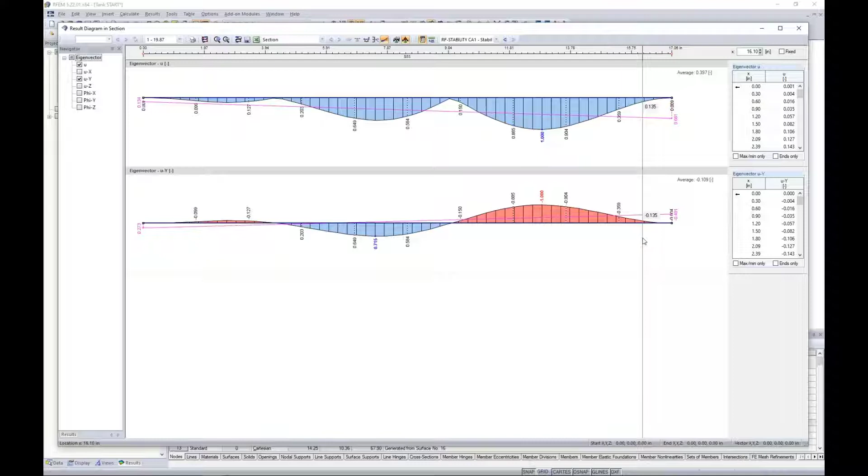Now, the reason I'm doing this whole procedure is because I want to relate this buckling to modeling imperfections. We all know that when constructing a tank or any type of structure, there are installation errors, maybe incorrect construction methods, or elements that aren't properly manufactured, and inevitably we have imperfections. Everything we're modeling within RFEM here is perfect, essentially, and this is true for any general finite element analysis.

All lines are perfectly straight, and all elements join together at every FE mesh point, when we know that in reality, lines probably won't be straight, and surfaces aren't all in one plane. Mistakes happen, and there are tolerances given for these mistakes.

This comes from the AISC Code of Standard Practice, in particular section 7.13.1, which discusses misalignment of members and surfaces and such. These tolerances can be less than L over 500, where L is the distance between working points.

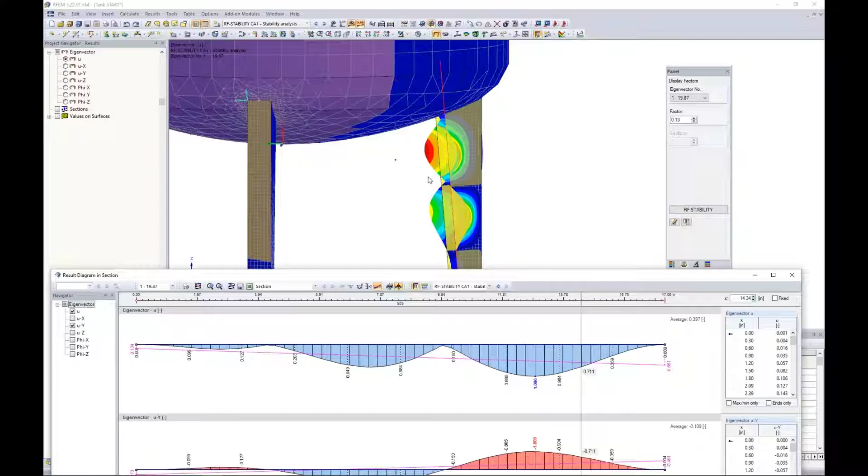Keep in mind that L is not the distance between the start of my surface and the end of my surface, but rather I want to use my working points, where I see my inflection points. Looking at the general buckling view here, I take a look at the first inflection point taking place at about 10 inches, then scroll over to the end at 17 inches. This would be my working point, at about 7 inches in total.

So what we want to do here is model the imperfection, keeping these tolerances into consideration. I also want to backtrack and mention that the AISC 360 tells us we should really model these imperfections directly. There are alternative methods such as applying notional loads, but in some way they should be accounted for.

We'll refer to the AISC Code of Standard Practice. Now that I have my working distance, we'll notice that RF-Stability just runs a general eigenvalue analysis, so nothing is given to us in terms of a length. Everything is unitless, so this buckling mode ranges from 0 to 1.0. I like to model this imperfection that can potentially occur and scale it based on L over 500. With my L being 7 inches divided by 500, we'd want to scale this to 0.014 inches, which is just 7 divided by 500.

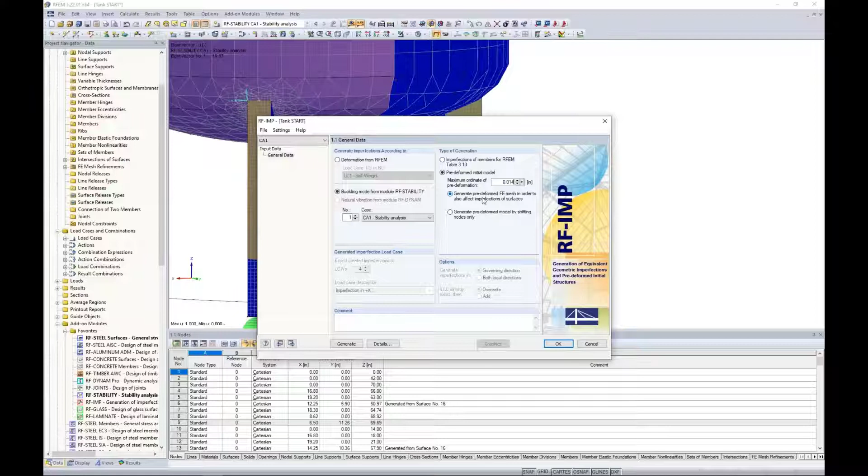We can actually generate the pre-deformed FE mesh in order to affect the imperfections of the surfaces. So when I click calculate, the program is going to deform the FE mesh based on the scaled buckling mode. Then we'll be able to consider that before we even run the additional load cases such as dead, live, or wind load.

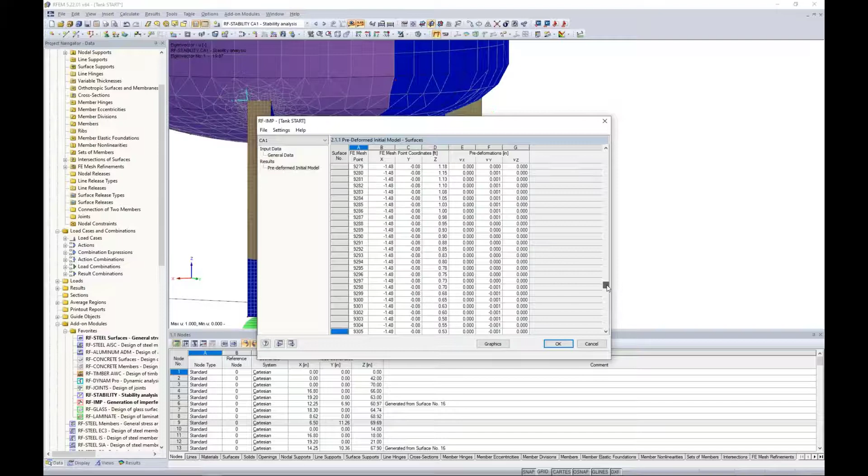After RF-IMP is done with the calculation, I can see every single FE mesh point listed from my model, and most are set at 0, 0, 0 because nothing's really changed. But eventually we get to a point where some of these values are being modified - you can see the big red arrow. The program's telling me it's going to deform the FE mesh at this location based on the scale of 0.014 inches that I gave it. So now this can be considered an imperfection and we can directly model it.

Once I'm done with the deformed mesh, I need to go up to my load cases and combinations. We visited this dialog box in detail in the first webinar. Under the Load Combinations tab, remember we generated all of our load combinations automatically according to ASCE 7. So I'm going to create my own manual load combination, which I can select from this button in the lower left-hand corner, and I'm going to replicate load combination 3.

So I'm going to call it 1.2 dead plus live plus wind - identical to load combination 3 we're seeing up here, but I'm going to take this a step further to apply the imperfection I just created with that deformed FE mesh. So I move all of my load cases over to the right-hand side to be considered, and I'll change my load factor for dead load to 1.2.

Under the calculation parameters, we have the extra options button. The extra options allow me to activate my deformed mesh from RF-IMP, so that imperfection, the deformed mesh, is now considered with these load cases I've defined. I click OK, and we can run this load combination by starting our results.

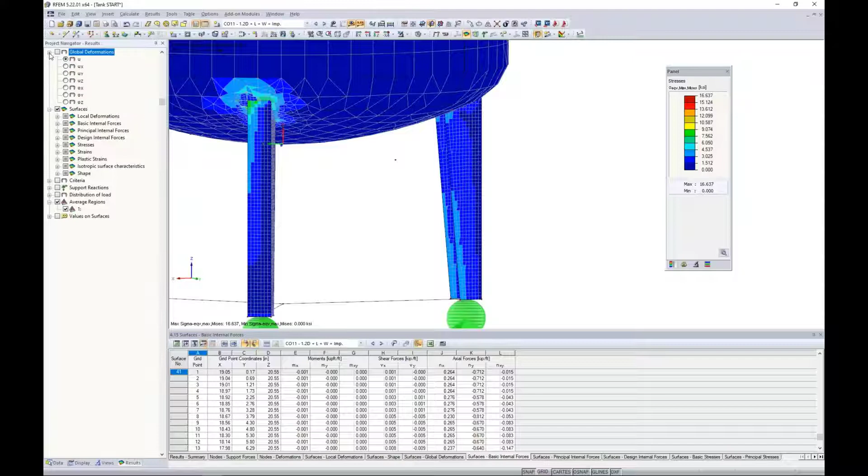But in order to make sure that the deformed mesh was applied, I did notice when I turned on my global deformations in the Y direction that we can see this buckling kind of mode shape with the deformed mesh is considered.

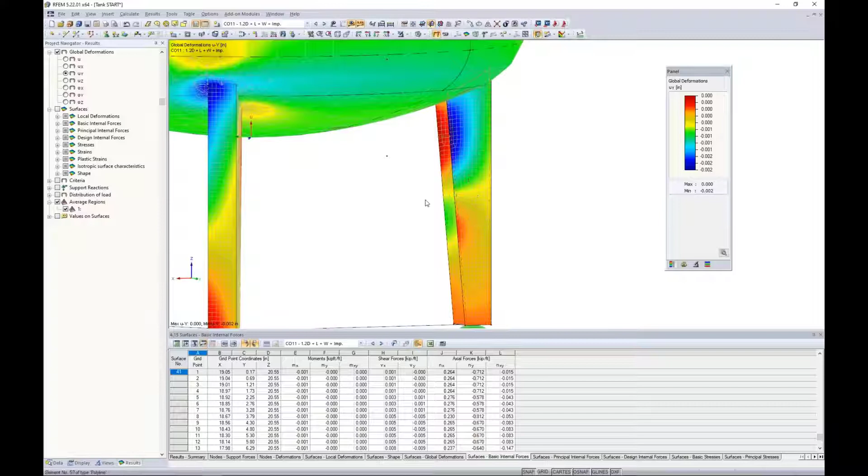We have ever so slightly some deflection here in the Y direction that indicates that mesh was deformed. Possibly with a third order analysis too, we could even see more of those results available to us. But this in general is just one way that we can directly model these imperfections, because not everything is going to be perfect as we're modeling here.

Rather there will be errors with the manufacturing or installation process. So the final thing I'd like to show you today relates back to RF stability. I said that we would touch on a nonlinear analysis for the buckling behavior of the structure.

Instead of going back to the add-on module, what I'm going to do is access my load cases and combinations again. I'd like to point out that under the calculation parameters, which I briefly showed you in RF stability for the nonlinear analysis, we actually have all those same options directly within the RFEM program itself under the particular load combination.

So we can incrementally increase a load here until our structure fails. You do need a license of RF stability in order to access this information. The reason why I'm doing it here in the load combination itself is because we have a couple other options that are not available to us within RF stability. So slightly more powerful here.

So what I'd like to do is once again create a new load combination. We will call this one 1.2 dead plus live plus wind plus our imperfection. And taking it one step further, we will check out this structure until it completely fails with this buckling method.

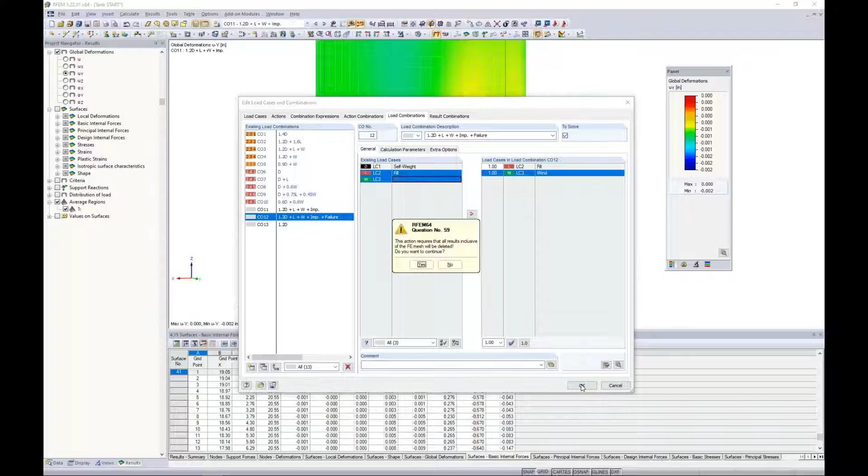So once we have defined this load combination completely, I can click OK. The program asks me to clear the results. That's fine. And we would want to run the calculation by clicking on show results for this single load combination.

For the sake of time, I went ahead and did so, since it takes a minute to solve. We're presented here with the deformation results for this particular load combination, and we have the ability to view the different increments, which was one of the checkboxes I selected.

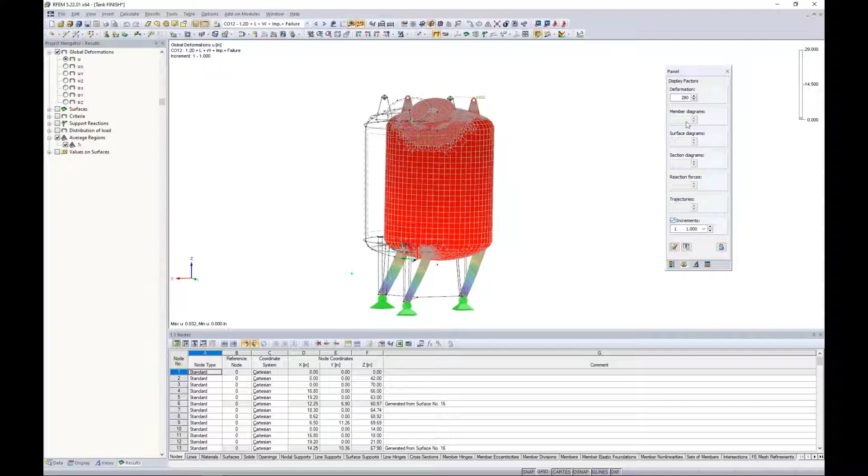I'll change my deformation factor to 30 so it's not quite so big, and lock that down so it doesn't change as I change increments. Under the Display tab, I'll hide the results and look at the FE mesh settings. It's default to show the FE mesh on the surfaces, but I'll change that to surface results, so as the structure deflects, the FE mesh follows. It makes the view easier to see what's going on.

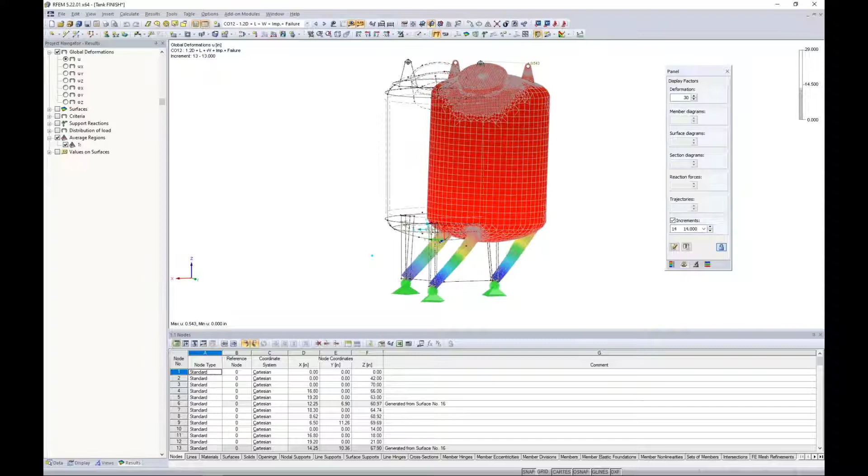So here's my first load increment, with 100% of my loads from load combination 12 applied. Now I can scroll through the different load increments to see the structure deflect under 800%, 900%, 1,000% of the loads. What will be most apparent is if I zoom in, we can actually see the buckling of that leg element.

I can even take my leg here and highlight it by choosing visibility by the selected objects, so we can really see the source of failure for this particular leg, and continue on with the additional load increments.

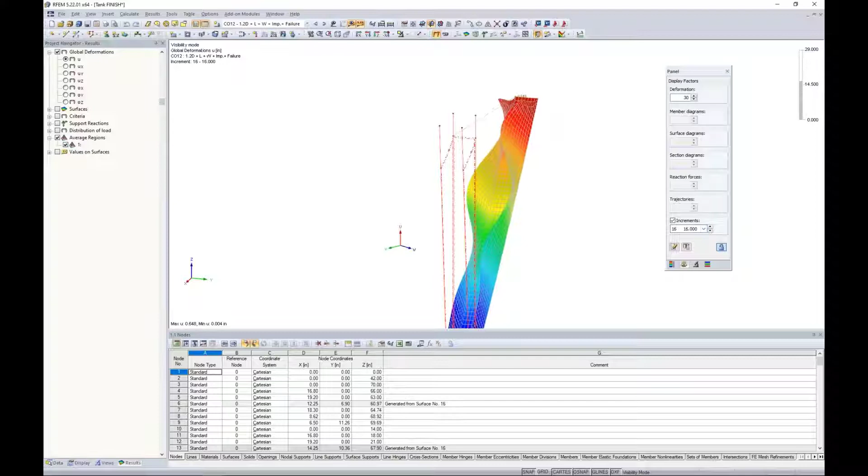Now I can activate the rest of my structure graphically. As we reach these higher load increments, the structure is still holding on. We're seeing very large deformations here. The deformation factor is set at 30, but obviously the leg is a problem until we get to a point where the program says it can't handle any more. It's reached 29 load increments and the structure has completely failed.

So we might be interested in load increment 28 here, and we can scale down our factor to 10 just to see the moments right before the structure fails.

These load increments are pretty high, but imagine dealing with a much more sensitive, existing structure, where we want to see how different applied loads can impact the failure mode—this could be a very interesting approach within the program. Then we can determine how we would want to modify the structure.

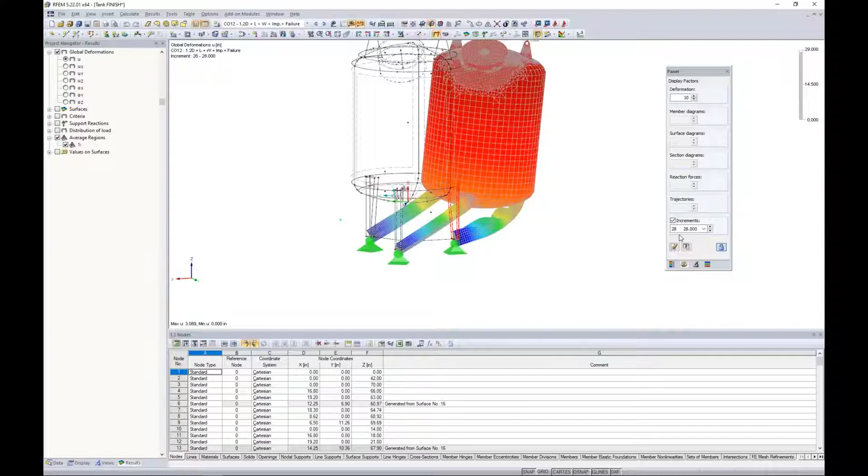Okay, so that essentially concludes our webinar today, and I will jump back to the PowerPoint for just a little bit of closing information.